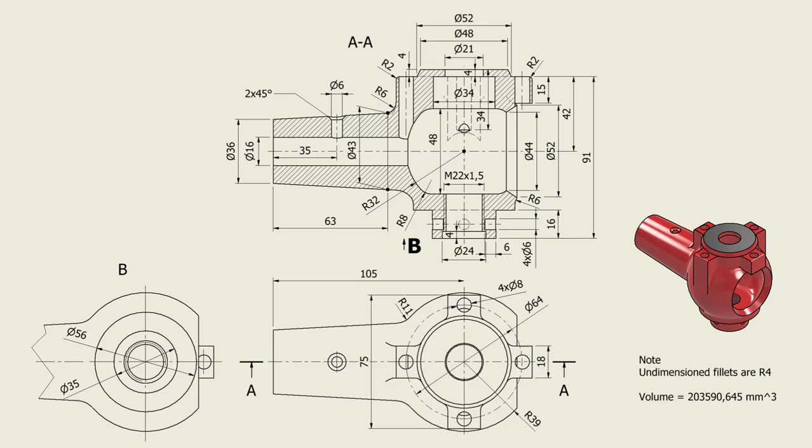Hi my friends, today we model this part, medium complicated, which has the name ball steam regulator support, and it comes from Timoteo Carrera Soto. This is the assembly and this is our model.

With all dimensions. This part is taken from Timoteo Carrera Soto drawings, and you can download it by watching the tutorial number 182.

This is my drawing, and we start with this revolving object. Dimensions are 105, radius 39, one end is here, 36. This conical volume has dimensions 63 with 43, and let's start.

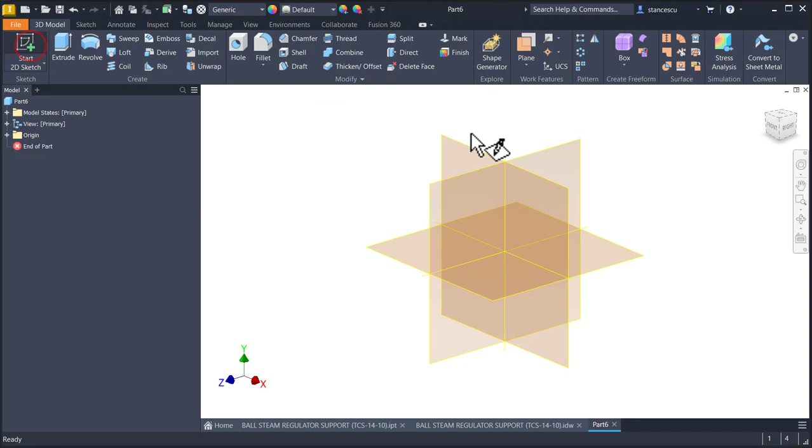New standard millimeters IPT, new sketch, XY plane. We draw a line starting from the center point with a length of 105. This is an axis.

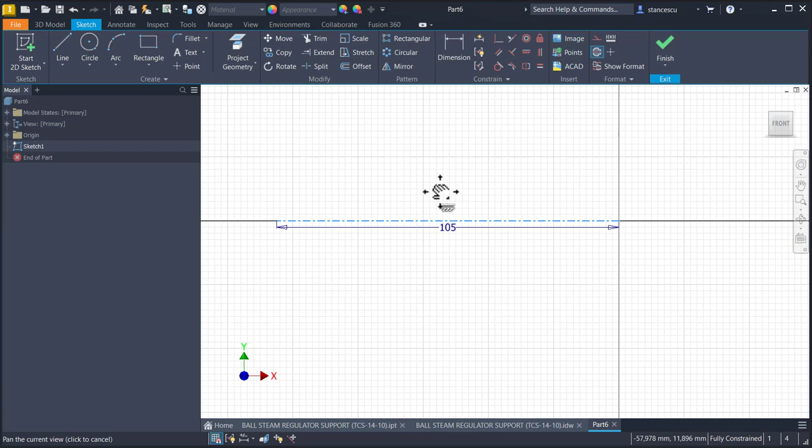We create some lines here, up to the right. I keep press the left button. I also keep press the left button. I make coincident this point with this line. I connect the two to have a close contour here.

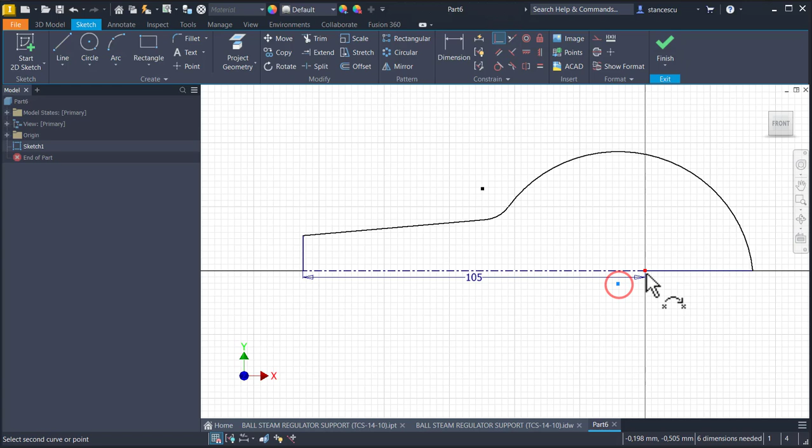This point is in the center point. Dimensions, this is 39, 11.

We draw a small line, a vertical one. You see the two yellow squares. This means that the line is in contact with both lines. Why? Because we applied dimensions in the drawing.

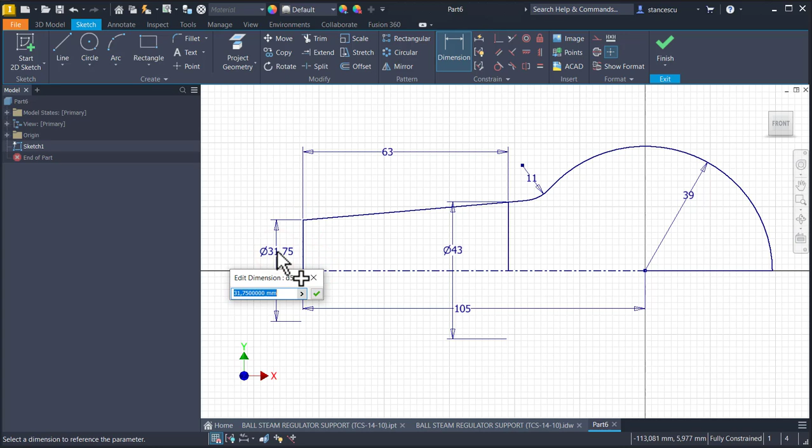This is 63, and this dimension is 43. This is 36, and we have a fully constrained sketch.

Finish sketch, revolve, select axis, OK.

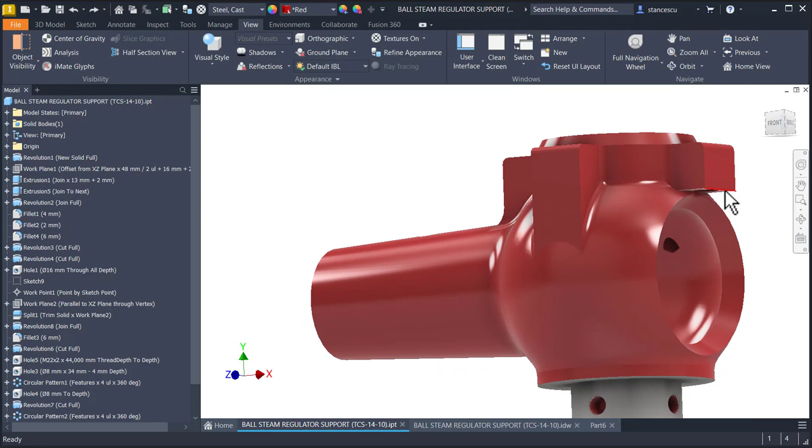Dimensions are here. You see 18, 75, diameter of 52 at the base. The placement of this face is at 42 from the center point. 15 is this distance.

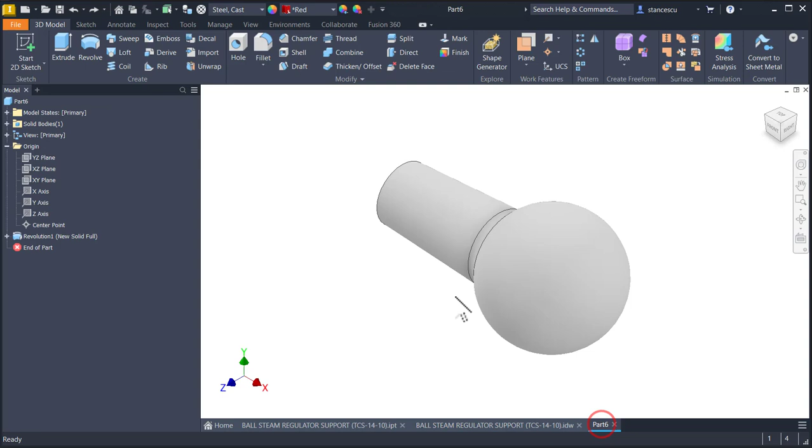We create a plane based on this, up 42 for a new sketch. A circle of 52.

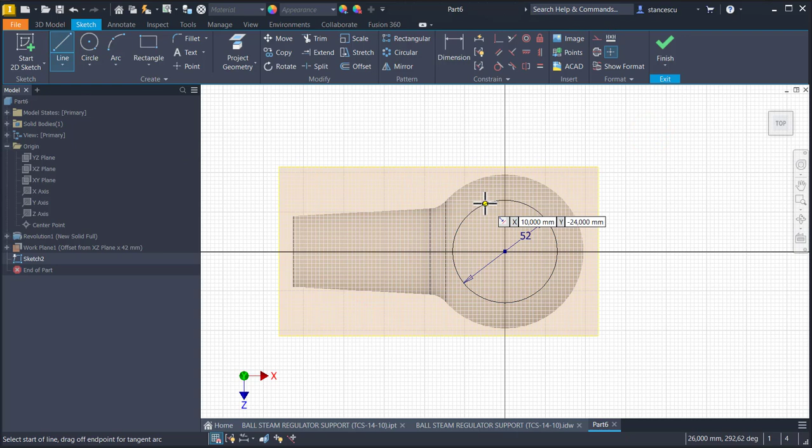Which is construction. Then some lines, as you can see. We place this center aligned with the center point.

This dimension is 18, and we apply circular pattern for these 3 lines about this axis, not 6 but 4.

I must make this not construction. We'll select each close contour, but I forgot dimension. This is that dimension, 75.

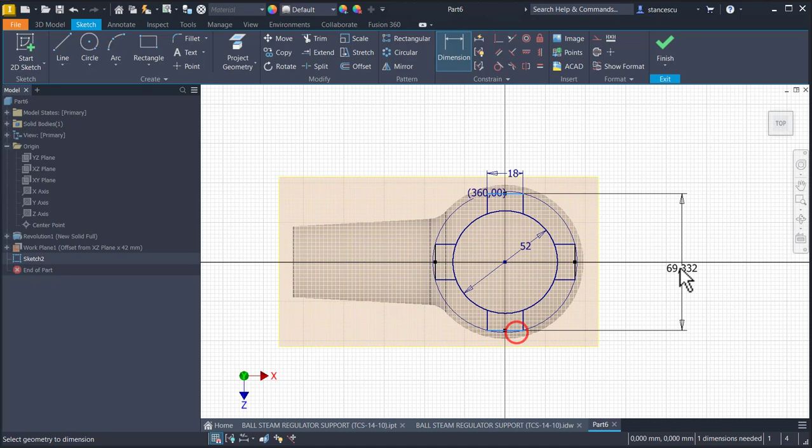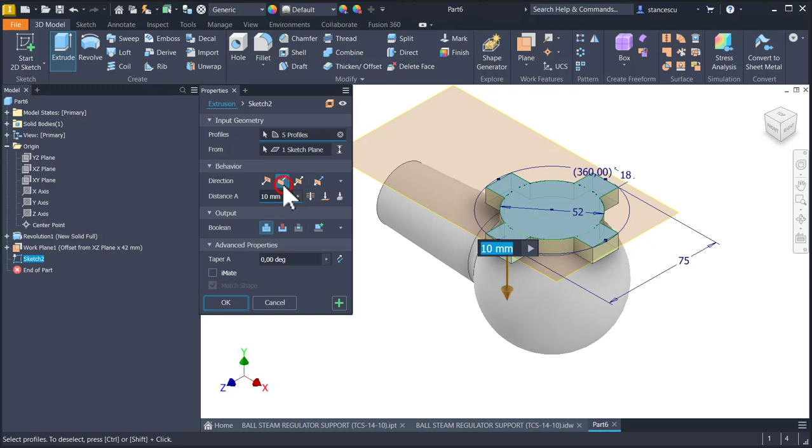This is the fully constrained sketch. Extrude 1, 2, 3, 4, 5. The other direction of 15.

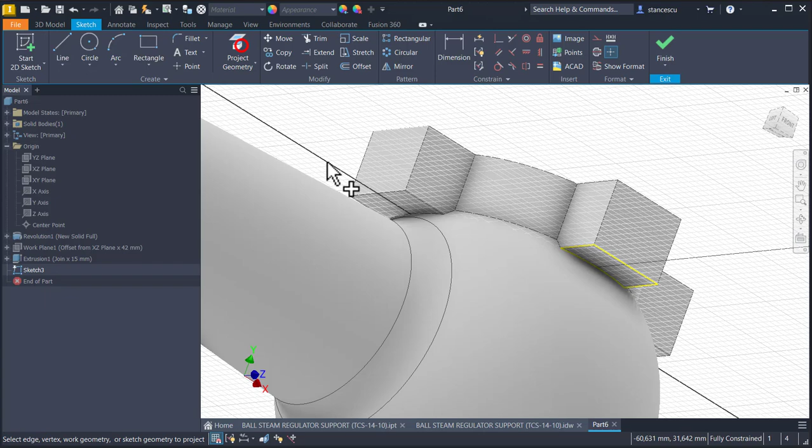I hide this plane, then I create a new sketch starting from this face, but projecting other 2 faces without this.

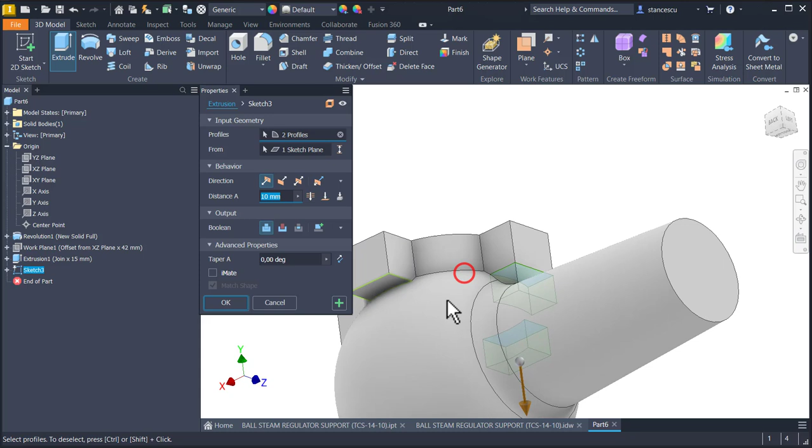Finish sketch, extrude 1, 2, 3 to next. Okay.

Then we see that there is this feature which has dimensions here 52, 48 and 4. Okay.

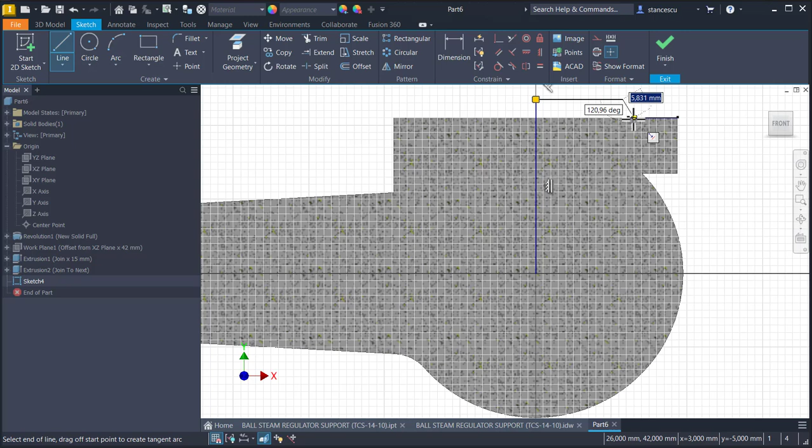XY is the sketch. F7. We draw a line starting from this point up to the right, sloped, and we go back to this. It is aligned here. This is an axis.

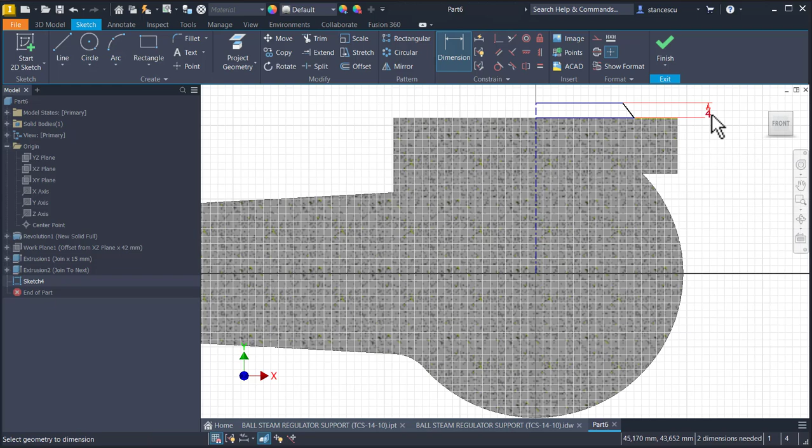Dimensions 4 millimeters is the thickness. 52, 48. 52 exactly, and 48 is this one. 48.

Finish sketch, revolve. Okay.

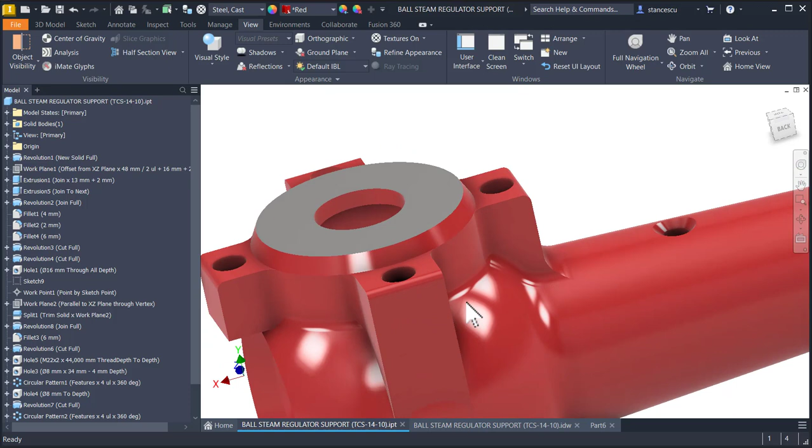Now we see here that the undimensioned fillets are radius 4. Okay, this means that all around here you see that fillets must be created, but this is not 4 millimeters. We have dimension radius 6.

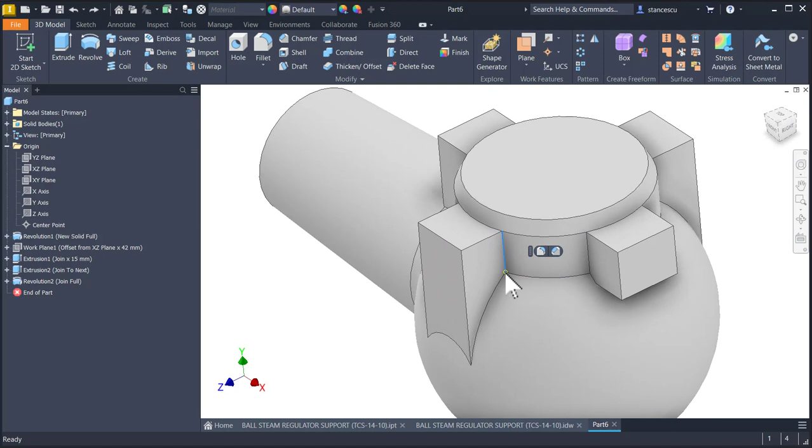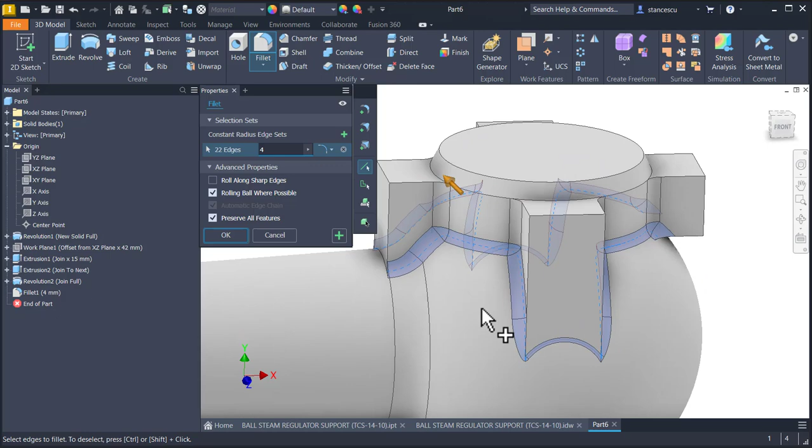We place that fillets. We select edges of with fillet 4, vertical first, then plus other ones, and that's all, plus this one which is 6.

Now we create this internal void which has dimensions radius 32, radius 8, and the distance of 48. The axis is this one.

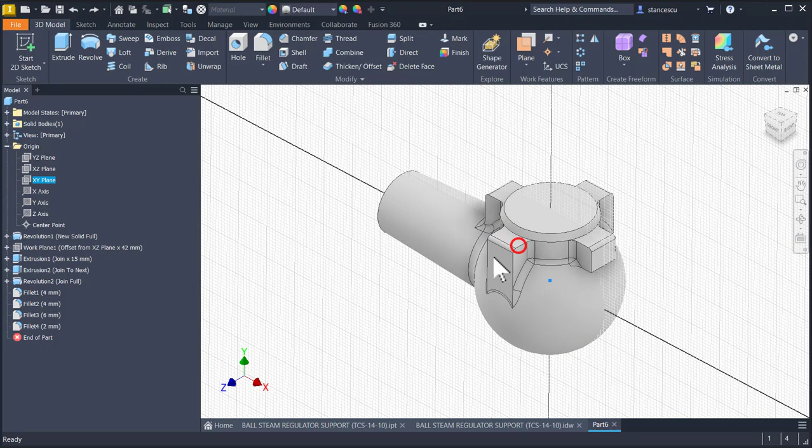Good. XY plane, sketch, F7, and we draw an axis 48. It is placed with its center to the center point.

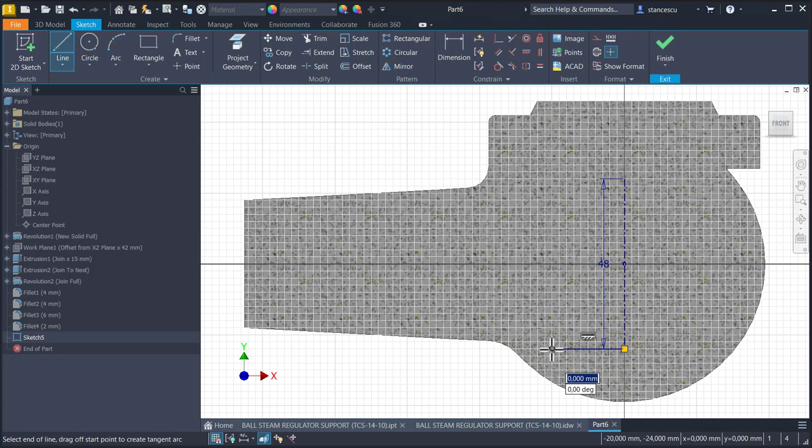This is axis, and we draw some lines and arcs. Start from here, keep press the left button, go up, keep press the left button, go up larger, and we go here and back. You see the 4 tangent constraints.

The point is placed also here. These 2 arcs are equal. Radius 32, this one, and radius 8, the other one.

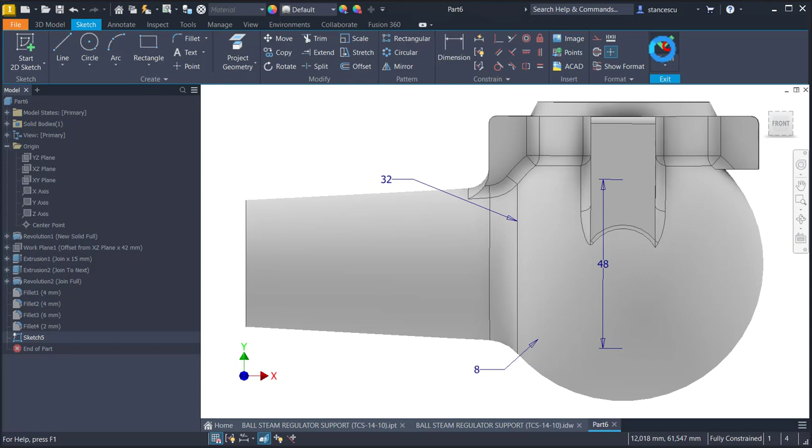Fully constrained sketch, finish sketch, revolve. We have that volume inside, but we cut. Okay.

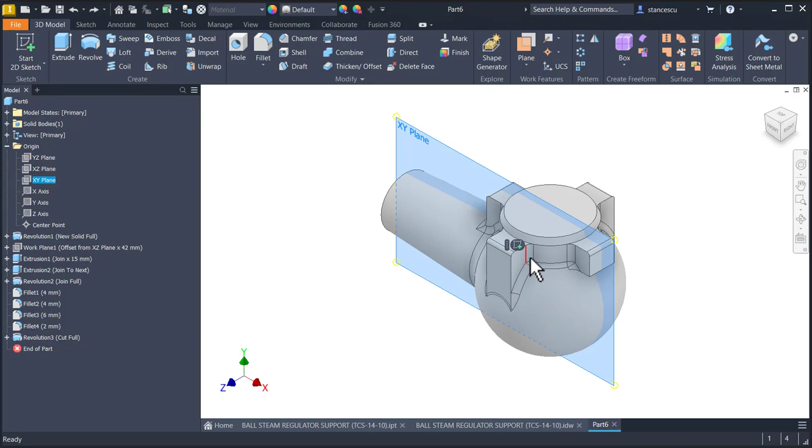Next is this cut, 44, 52, and the axis is this one. XY plane, sketch, F7, an axis, this axis.

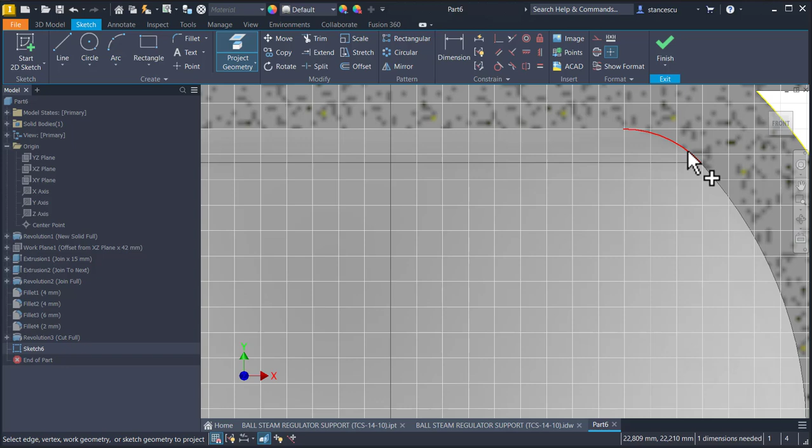We project this and this because we intersect this arc.

Then we draw a line up and to this arc. Trim this end here, and let's place dimensions.

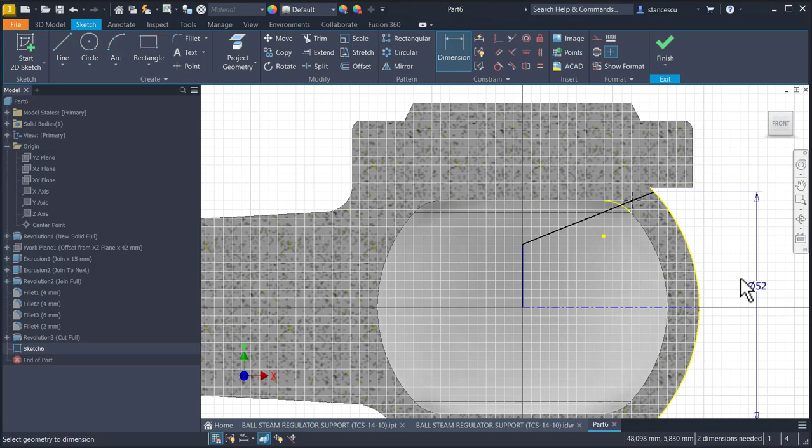A point is here. This is 52, not 44, and we place this point on this arc. Yes, coincident point and arc.

Then dimension for the point. This is 44. You see, not this, but this is the intersection of the line with the internal cavity.

Okay, then I draw an arc from this point to this point. Oh, but I cannot catch it, so that I project this arc.

This is construction because I want to draw that arc. These 2 ends and this dimension. A closing line is this one. It is placed under the axis.

We have a fully constrained sketch. Oh, we don't need this. We don't need this. We need, my friends, these are not important.

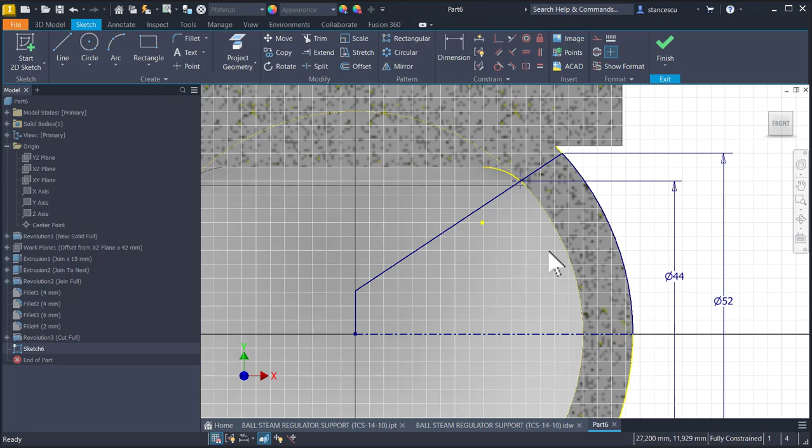We need to place an arc outside from this point to this point and to here. Why? Because we cut the volume with all this area.

Finish sketch, revolve, cut, OK. You see, this is very good and very nice.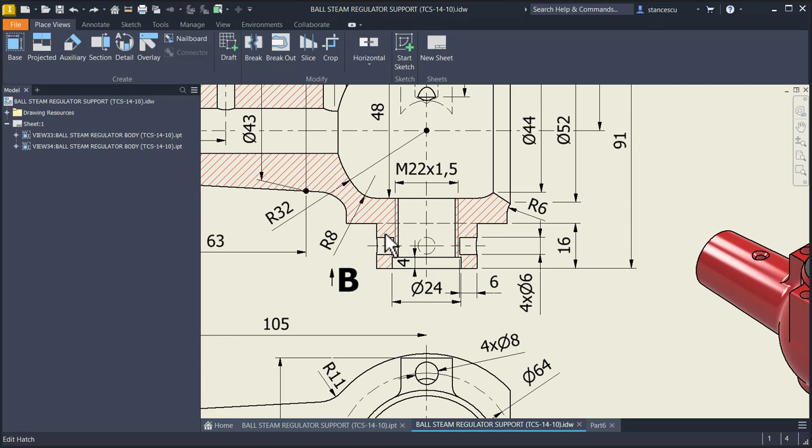Now we have to create this face in order to place there some other features. The position of this plane is 91 minus 16 measured from this line.

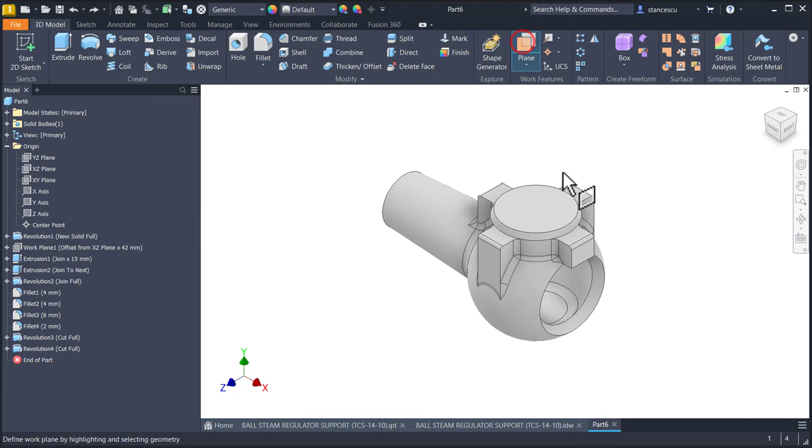Let's do this. Plane from this face down at you see the sign, yes, minus 91 plus 16. See, this is the plane.

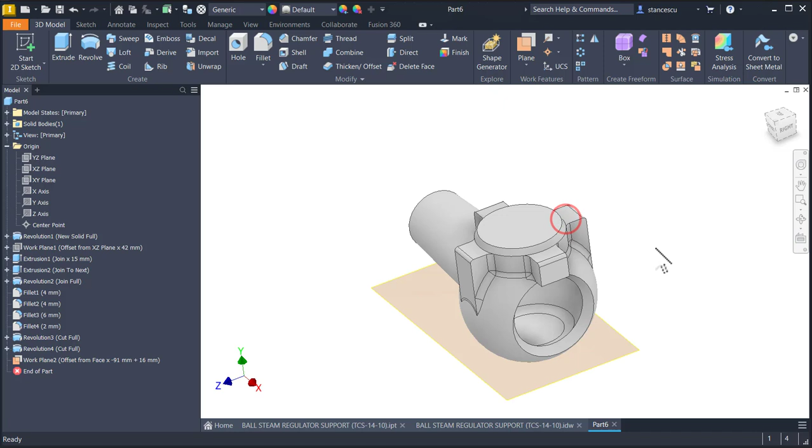I want to make it larger. Auto resize. Now we see what happens.

This is the plane for a split. This is the tool, and we select up or down. Down is the direction of the cut. Yes? Okay.

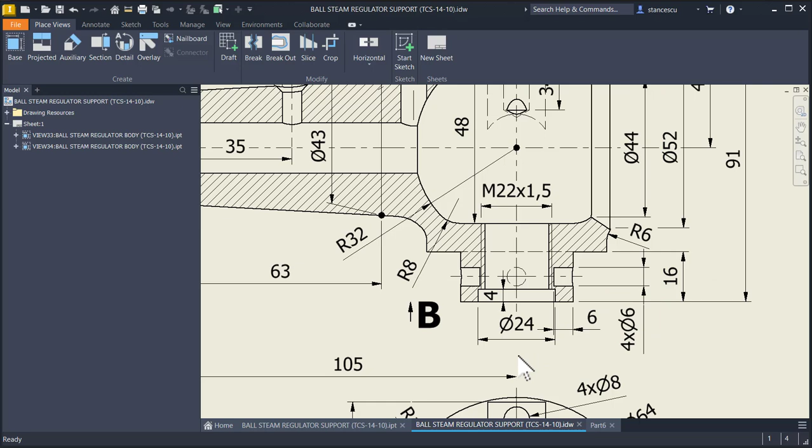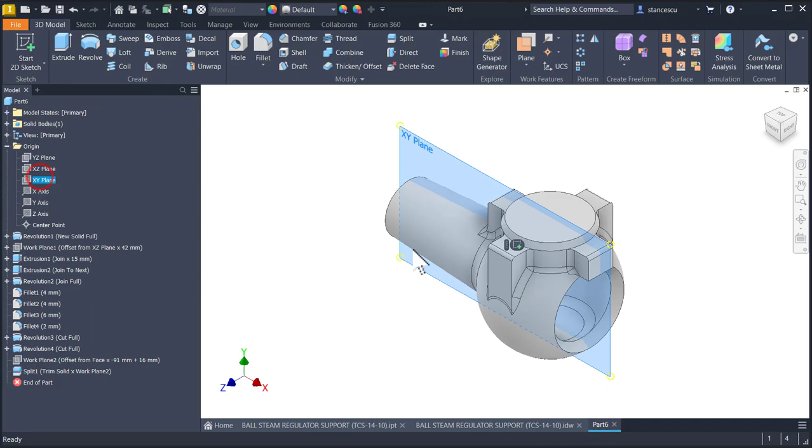The plane is no more necessary. Good, now we place that feature. You see this contour. Dimensions are 16, this 16 from 91, but the other dimensions are here, 56 and 35. Okay, we have everything here. Let's do this: XY plane, sketch, F7.

We project this face and we draw lines. This is the axis, this will be the axis. Horizontal, down, right, and close.

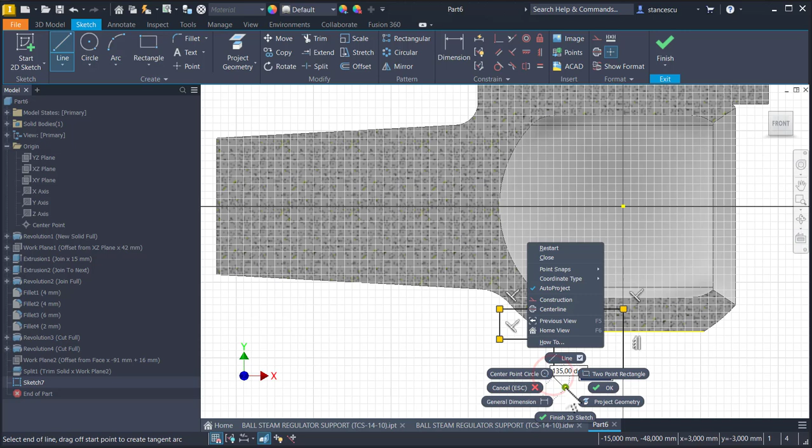As I said, this is the axis. I place it coincident with the center point. I place this line, not that line, this line aligned, this line aligned with this. Then I project this line to make collinear these two.

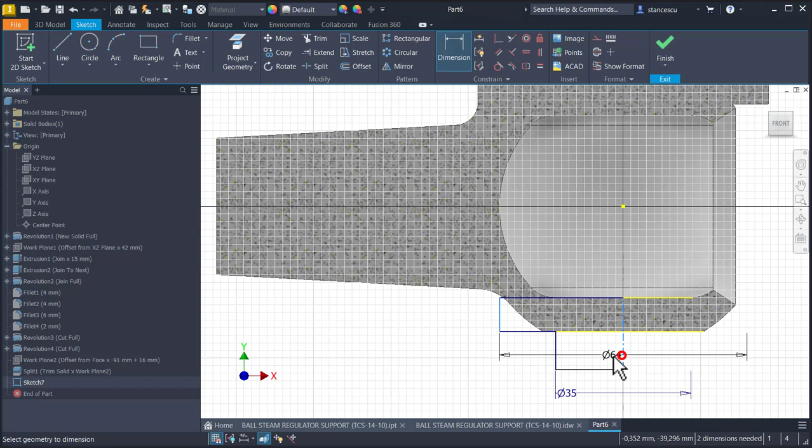Dimensions are this one, which is 35, and the other one 56. This distance is 16. Okay, finish sketch, revolve, select profile, this and this. We didn't make this construction line, and now we have problems. We add volume here. Okay.

Now if you take a look here, there is a radius of 6. We apply a fillet of 6 here. Okay.

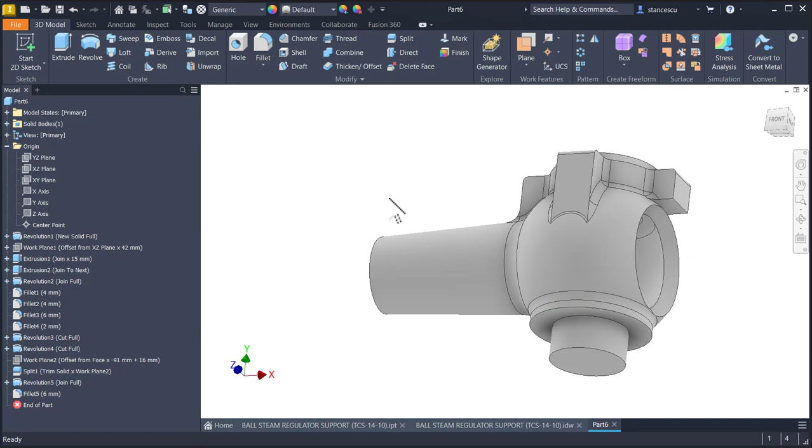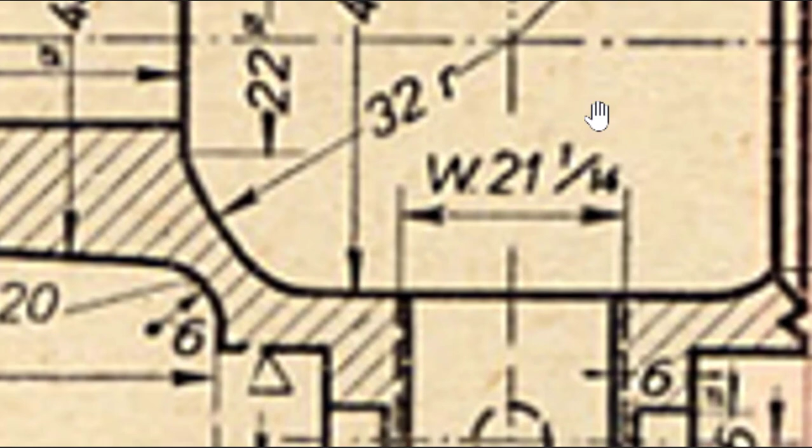We have to create other cuts, but we start with this metric 22 with a pitch of 1.5. You see, here is a dimension which is not clear for us today. This is Whitworth thread, I suppose, but what is its 21 inches? I don't know. I place here metric 22 with a fine pitch, which is 1.5.

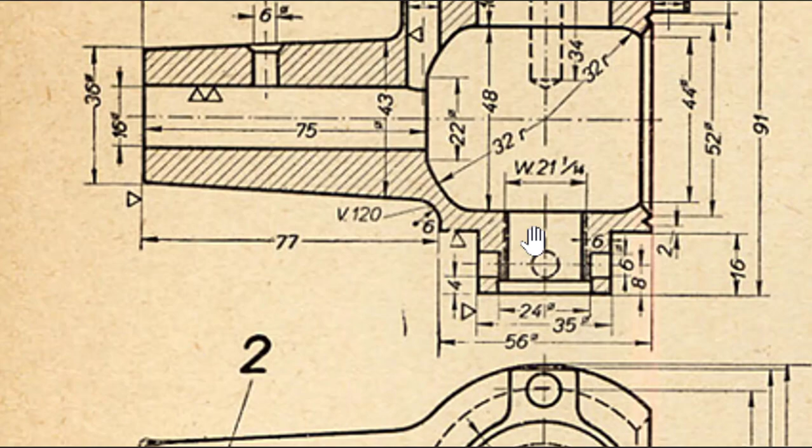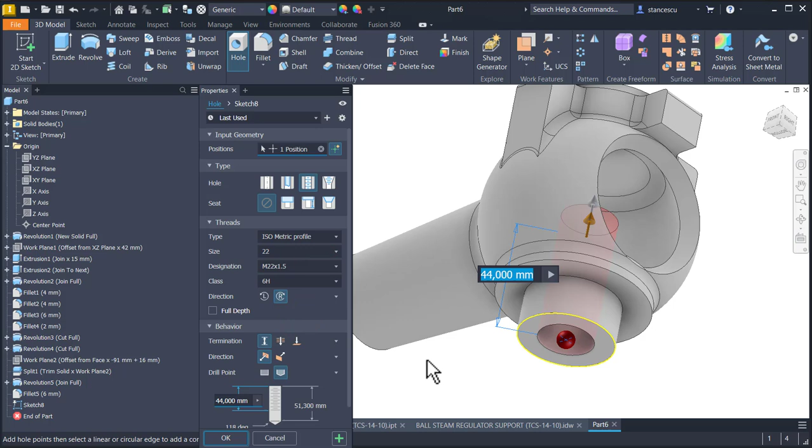So I place this firstly as a hole with the thread, this face and this center. The definition is ISO Metric profile, 22, pitch 1.5, and the hole goes to this face. Full depth is the thread. Okay, good.

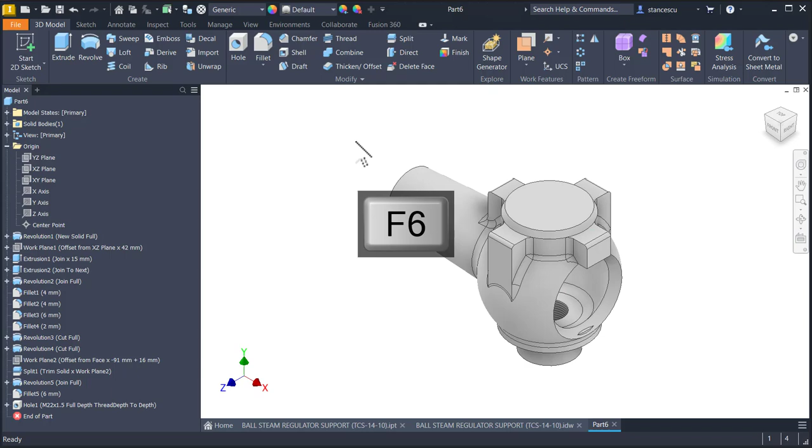We continue with dimensions 34, 21, 4 millimeters here, like this one, 4 millimeters again, and 24.

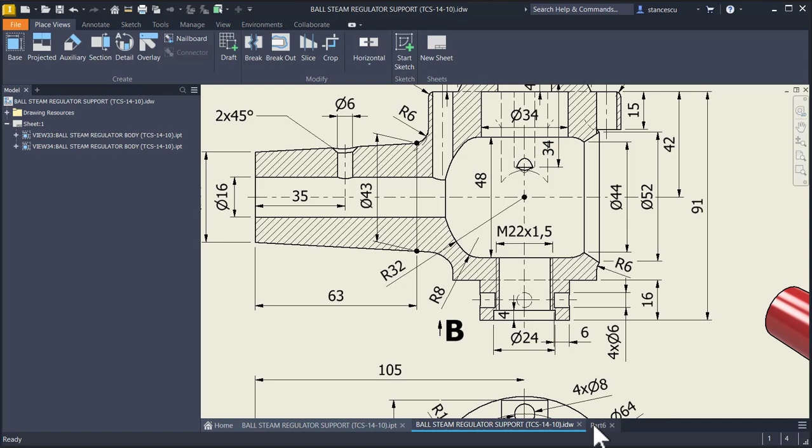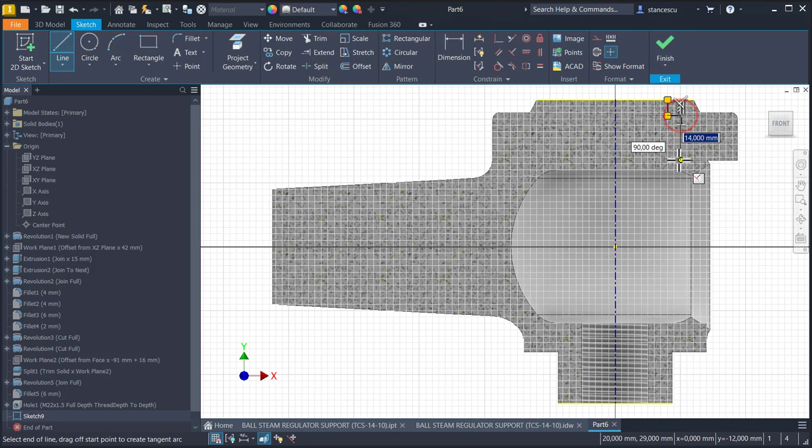Let's place these lines which compose a sketch. I draw a vertical line between this center and this center. This is the axis. Then I draw a line here, another one here, another one goes anywhere here.

Then another contour is a rectangle with dimensions depth 4 millimeters, and this is diameter of 24.

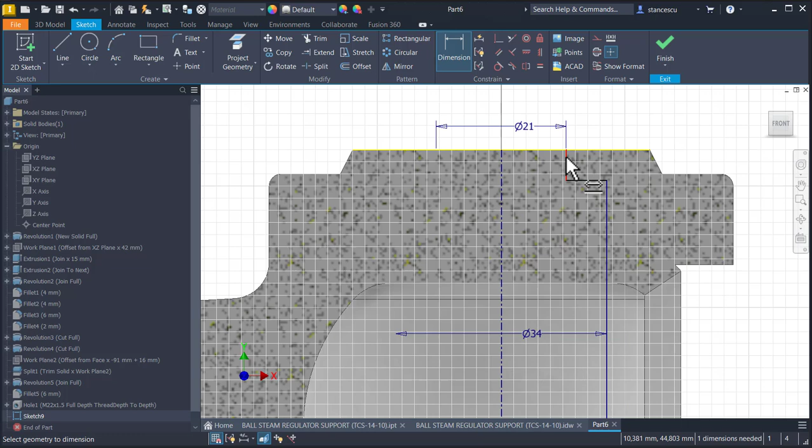Here we have dimensions. This is 21. This is 34, and this is 4 millimeters. Fully constrained sketch, finish sketch, revolve.

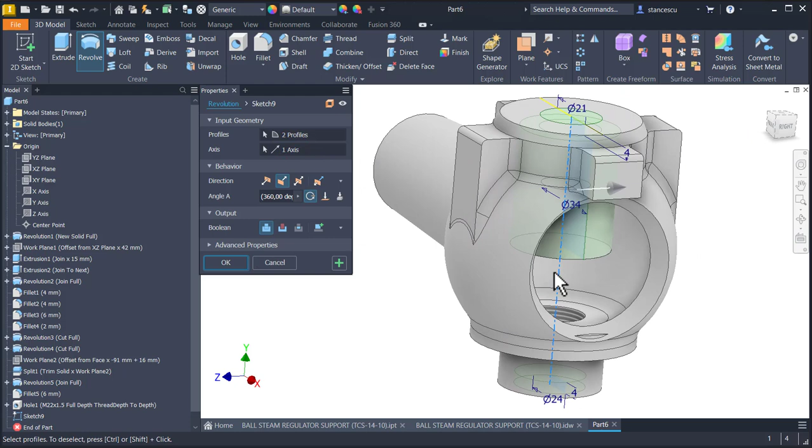One is this, other is this, this. Select axis, this is the axis. Cut. OK.

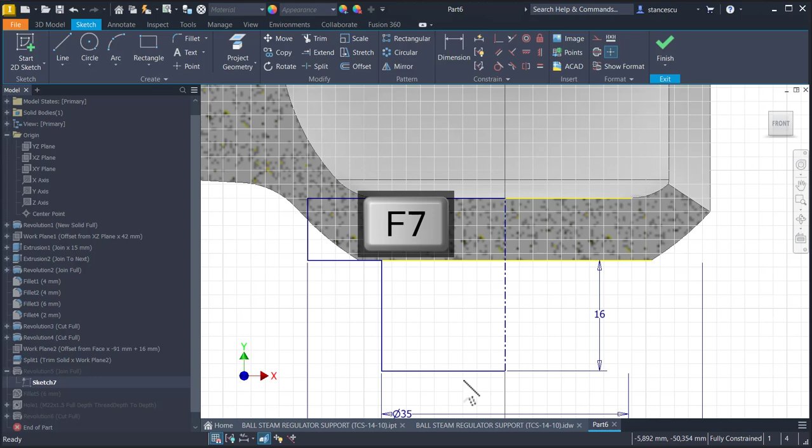Now I see that here is something unexpected. Why? Because this revolve was not well placed up. Let's see where is the sketch. This is the sketch. Double click, F7, and we don't align this with this line, but with this point. I delete this line.

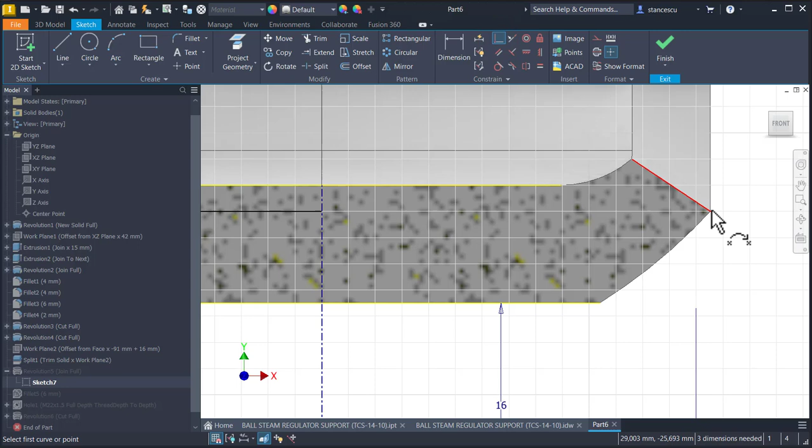And I draw another one between these two lines, and I take care to project to place at this end this line, you see, then trim here. Now this contour will be not outside this conical face. Finish sketch, it disappeared.

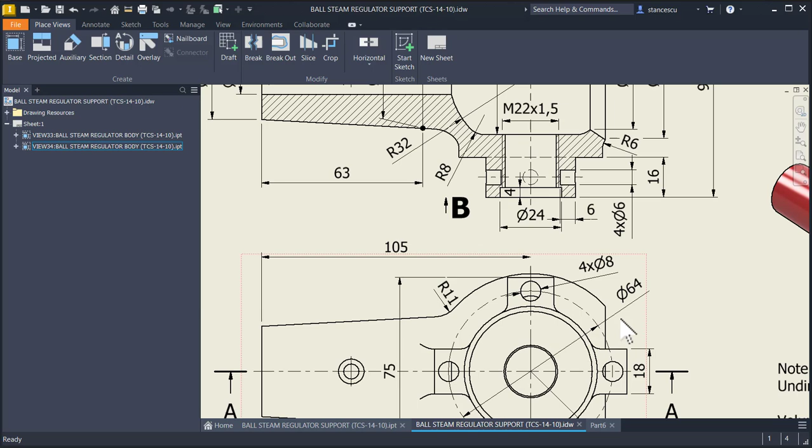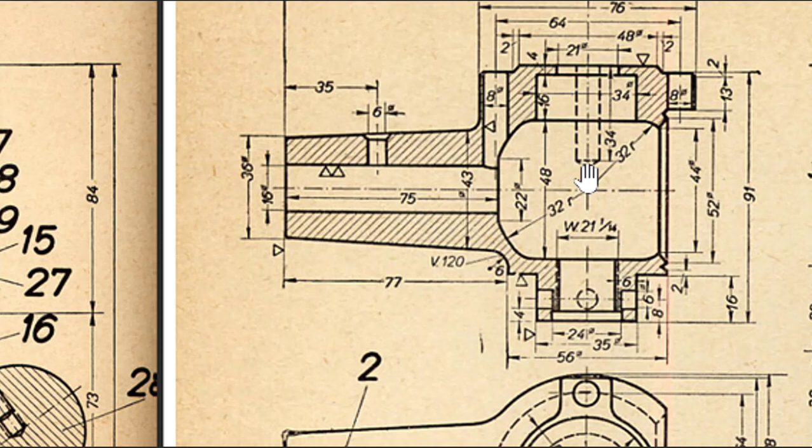Now we create these 4 holes. Dimensions are here: 4 holes of diameter 8 placed on the circle diameter of 64. The depth is 34, and I see that it goes outside. Timoteo doesn't observe this, but I respect dimensions here.

Good, let's see how to continue. 34 measured from here. We select this face, or better this face, for a line, only one line. This is half of 34, half of 64. 64 divided by 2.

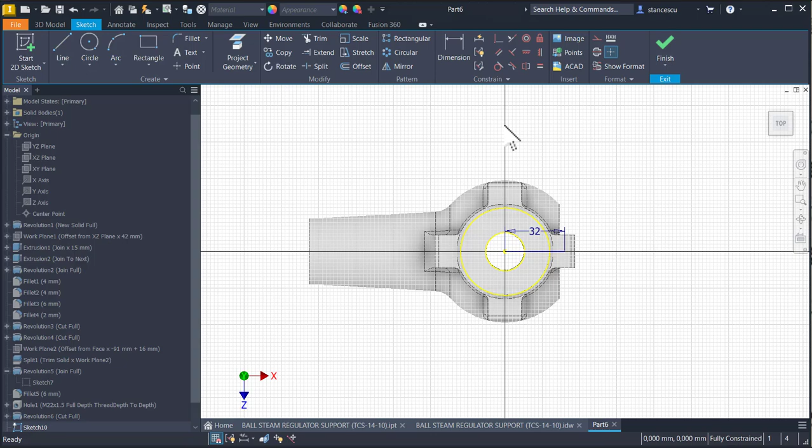Then we place here a hole, not threaded, on a distance, placed in this point, diameter of 8, depth of 34. Okay.

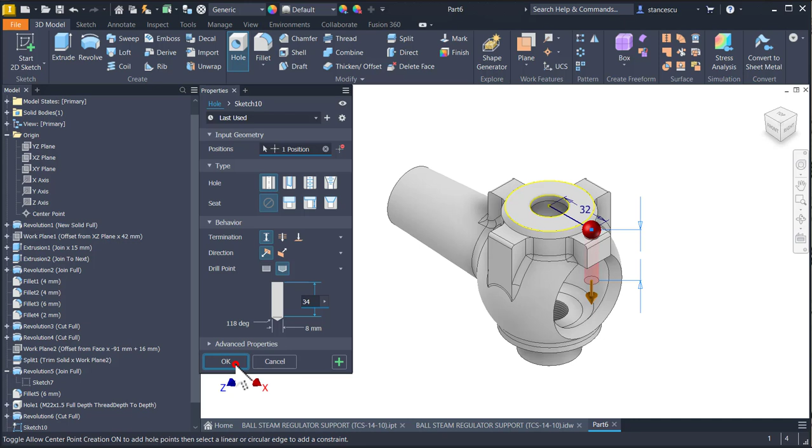Then we copy this hole around the vertical axis. Circular pattern of the last feature about this axis, not 6 but 4 instances.

Okay, now we know that this is not well placed. Let me create another hole from the drawing. This one, diameter of 16, to this internal hole, or through all. Hole, position face, position center, through all, diameter of 16. Okay.

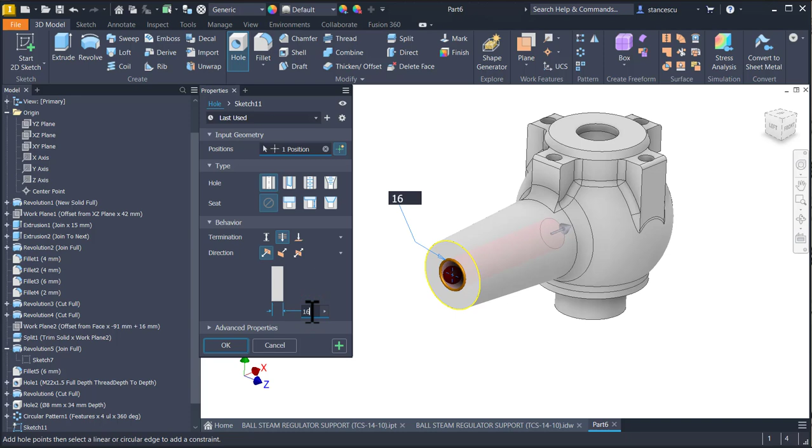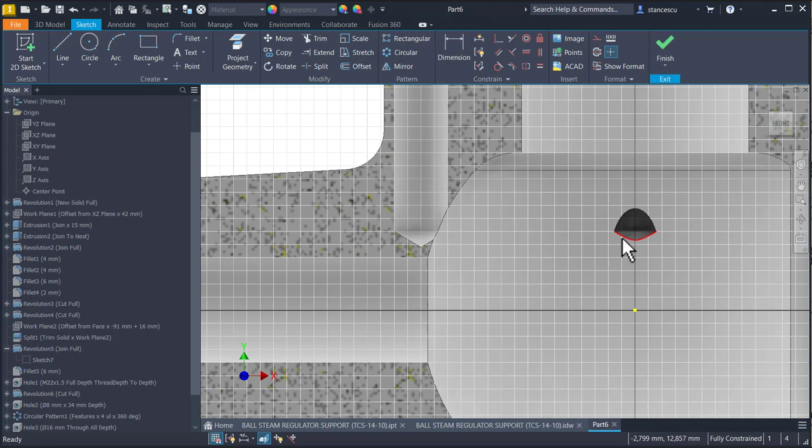Now I select this plane XY to create a new sketch. F7. We see that this hole is not through. This is that small mistake, no problem with this.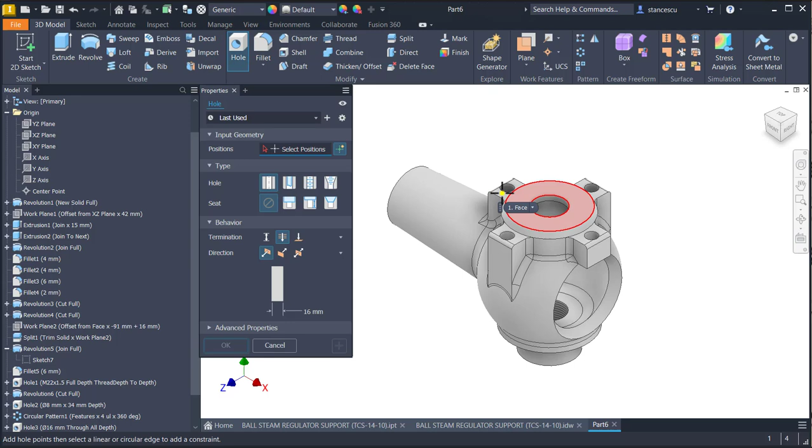To create the full hole, I apply another one over this one. Hole, select positions, this face, this center, diameter of 8, and distance is to this plane. Yes, here. Okay.

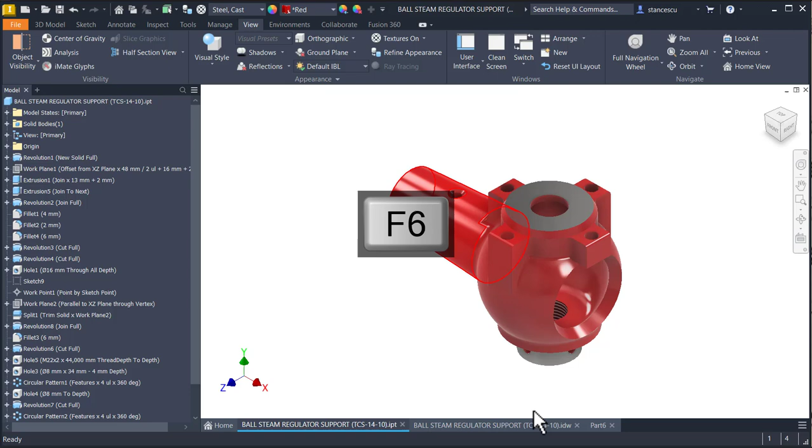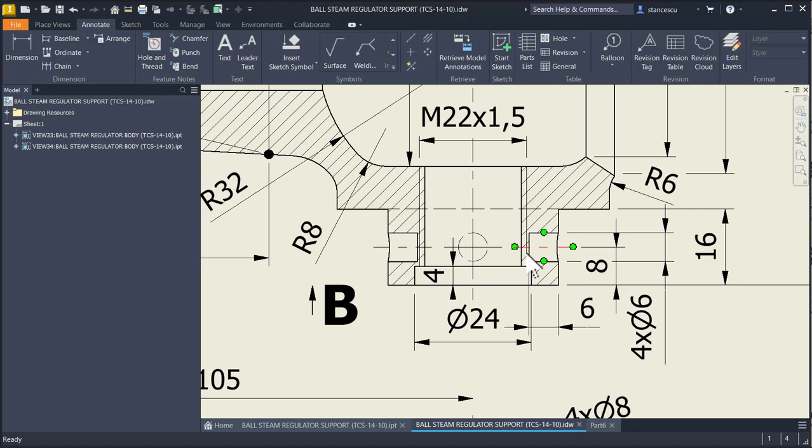Other holes are this 4 and this one. Let's see what are the dimensions. You see here this hole which has no dimension up. Let me place it. This is 8. The diameter is 6, the depth is 6, and flat end.

We create a sketch here. XY plane, F7. I project this line, I draw a rectangle, this rectangle. This is the axis, not construction, but axis. Diameter of 6.

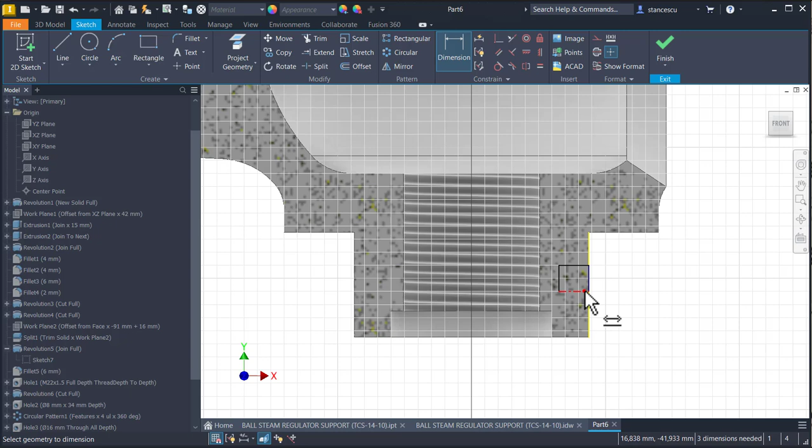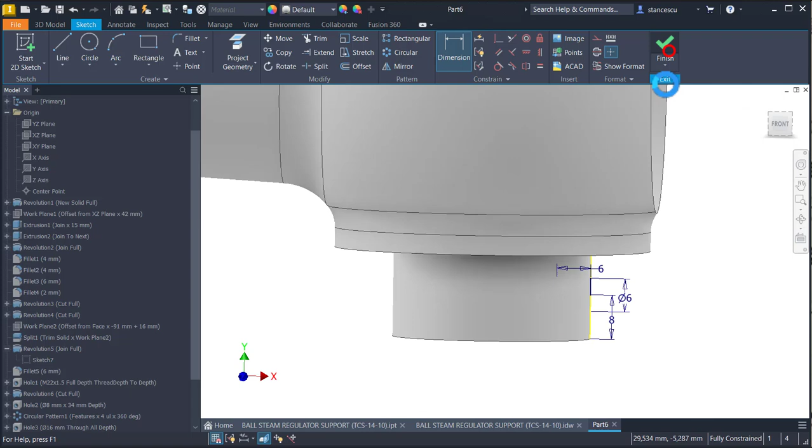6, distance of 8, 8, and the depth of 6. Fully constrained. Revolve with cut, and you see the result. Then we apply circular pattern for the last feature about the vertical axis, 4 instead of 6.

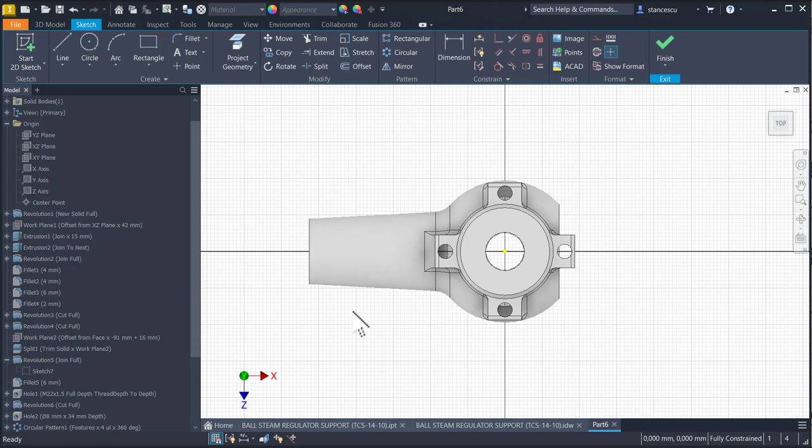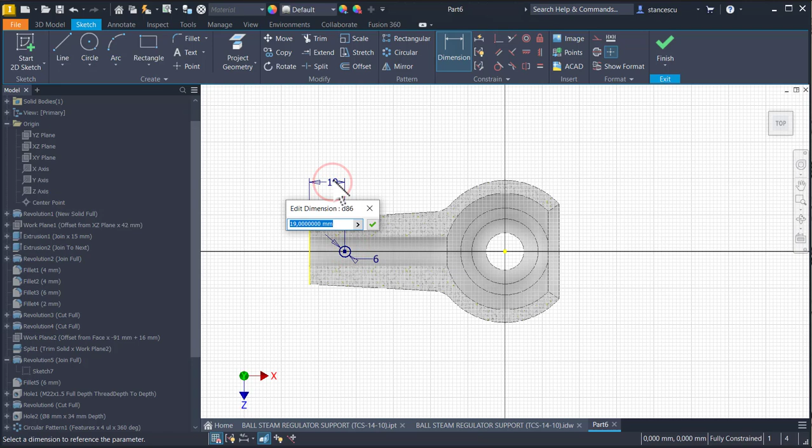Okay, dimensions for the last hole are here: diameter of 6, 35 from the left, and a chamfer 2 millimeters. I use this plane, F7. I draw a circle with diameter of 6, placed on the same horizontal with the center point at a distance of 35. Finish sketch, extrude

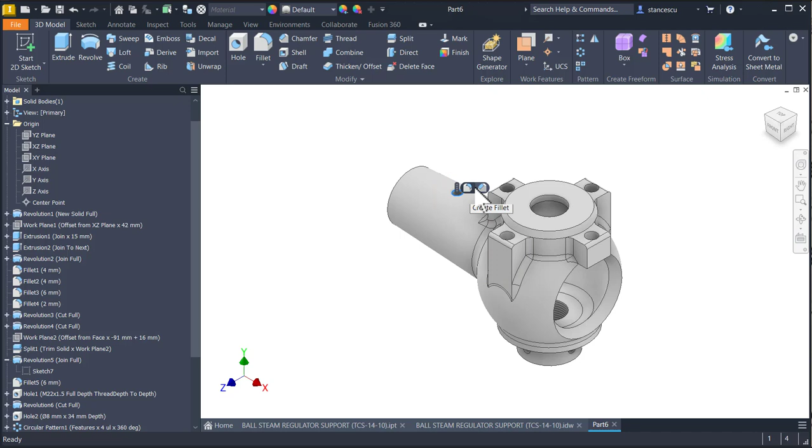with cut, the other direction, cut through. Okay, chamfer of 2, 2 is by default. Okay, now I made a sketch here only to see inside. I delete this sketch. Good.

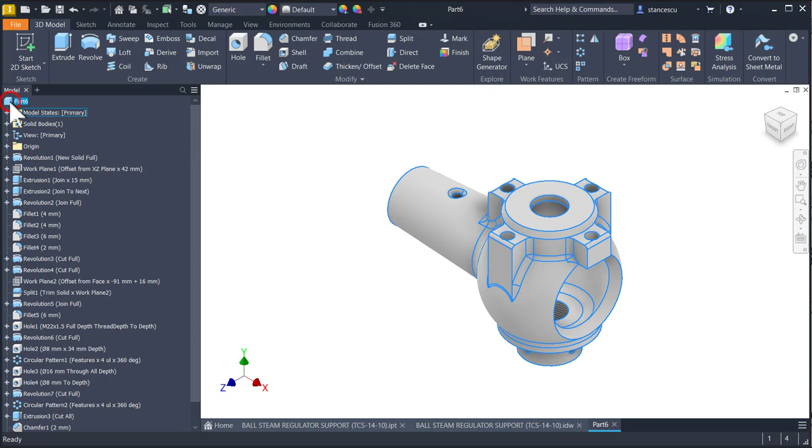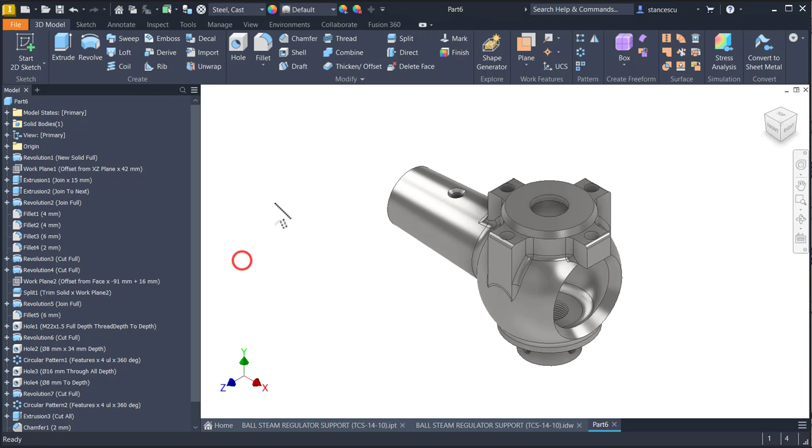Also good. And now let's see what is the volume. Properties, physical, update, copy, close, drawing, double click, paste. Oh, there is a small difference here, so that we keep the last value because this is what we did here. The part is made of steel cast. The color, general color, is red.

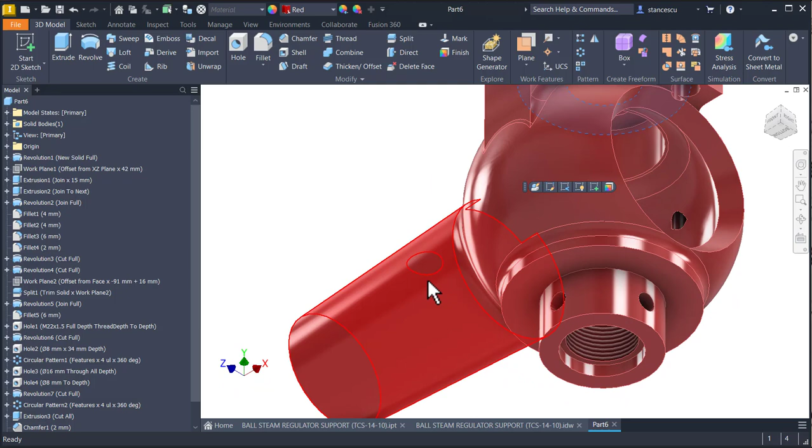We select some faces for machining. That is one, I keep press the shift button to select all of them. And the aspect is still polished. We apply view with shaded and we compare the two. You see? No differences.